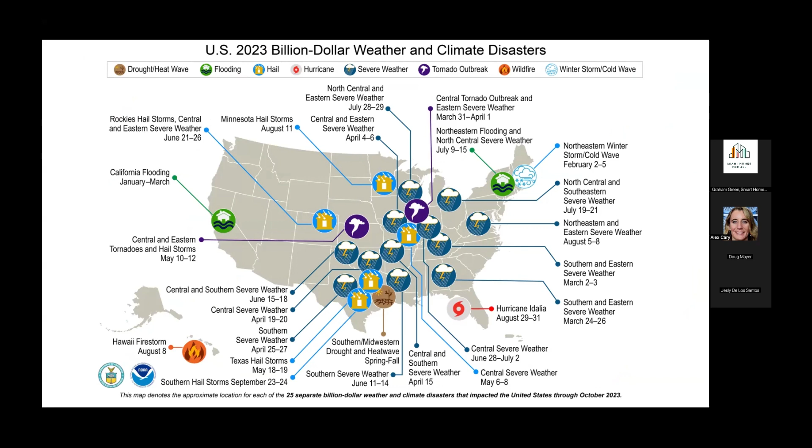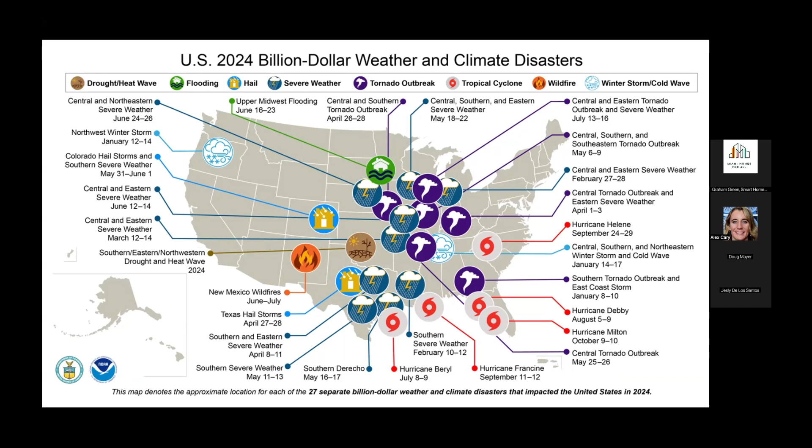Next slide, please. The Insurance Institute for Business and Home Safety, which Mary's going to speak a little bit more about, they are the science behind FORTIFIED. We take that science, we bring it to the communities and to folks like you to spread that knowledge. Next slide, please.

Mary, this is where I'm going to take over. We can do our work without Smart Home America, but it does not have nearly the impact that it has with them. They really do a great job of taking the science that we do and the standards that are developed and getting it out to make an impact in the world. It doesn't do a whole lot of good to do science and keep it in our lab.

What you are seeing here is our research center that is located outside of Charlotte. We are also a nonprofit. We're fully funded by the property and casualty insurance companies. And our mission is to find solutions to make homes and businesses more resilient. And so as part of that, we do a lot of science at this research center, and we have 2 mitigation programs.

We're talking about the FORTIFIED mitigation program today, and we really study 4 perils. We study wind, rain, hail, and wildfire. FORTIFIED covers the first 3, and then we have a separate mitigation standard for wildfire. So we're going to do a quick tour of the research center next.

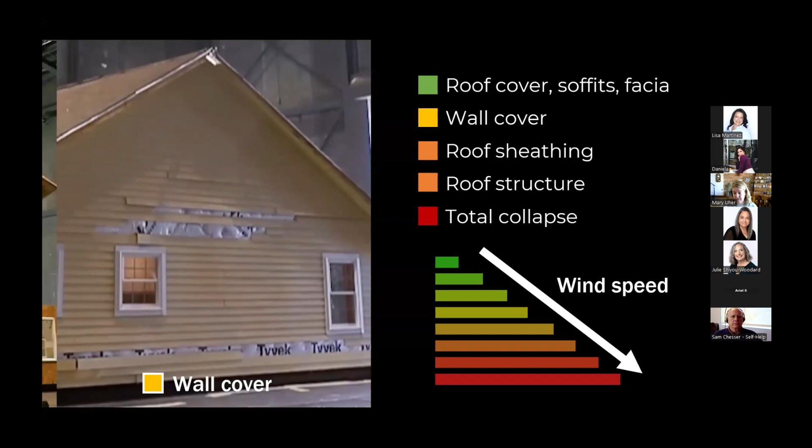To summarize what the expected sequence looks like: the first thing we're going to see is damage to the roof cover. That roof cover is going to come off, then wall cover, then either roof sheathing or structure, those are interchangeable, and finally, total collapse. So we know now that that is pretty predictably how any building is going to fail from a high wind event. The wild card in there is if something goes through your large opening and creates a big opening in your house, it could change that order some. And so that's where we talk about the garage door damage amplifiers.

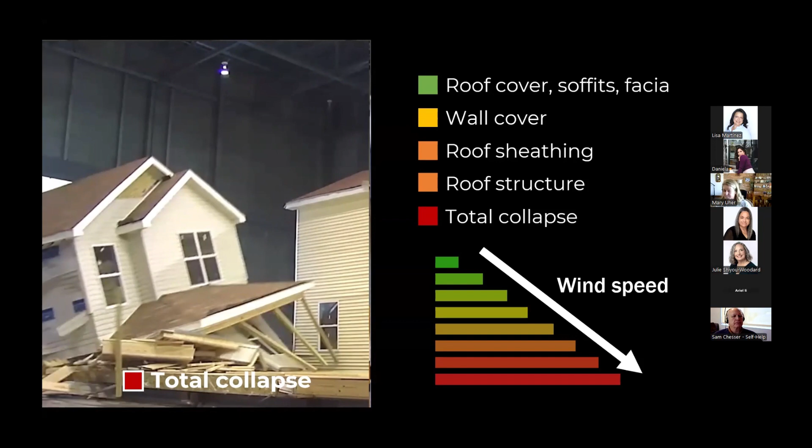So doing hurricane damage assessments, what we have learned is that newer roofs always do better. That's not terribly surprising. Homes built to newer codes did better. So that is really encouraging for you guys in Florida. Following Hurricane Ian, yes, it was catastrophic. Yes, there was a lot of damage, but the homes that were built to a well-enforced modern code really did a pretty good job.

Anywhere that you have low slope roofs, those are vulnerable. Installation is really important with any material. Low slope roofs are historically poorly installed or not installed in the way that they're recommended. So we see more issues there than we do in other places. Garage doors can act as damage amplifiers. And then we're going to talk quite a bit about sealed roof decks and how the use of a sealed roof deck can limit water intrusion.

And in Florida, you guys are lucky. Sealed roof decks are already part of your code. They are not part of the code nationwide. So this is something that for my family in Nebraska, when they re-roof, they put a sealed roof deck on, because even if they do lose their roof cover, they're able to keep that water out.

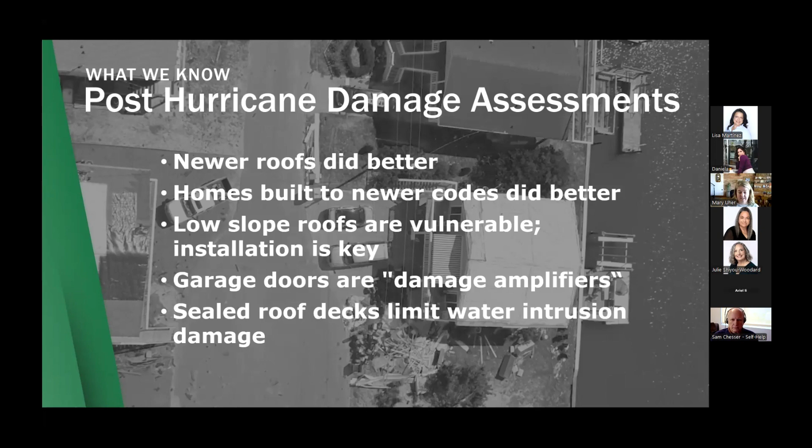So you will hear me, anyone who works for IBHS, say many, many times that mitigation always starts with the roof. And that is because up to 90% of post-cat claims include damage to the roof. So that is the spot that we are seeing the most losses. It's what we expect based on progression of damage.

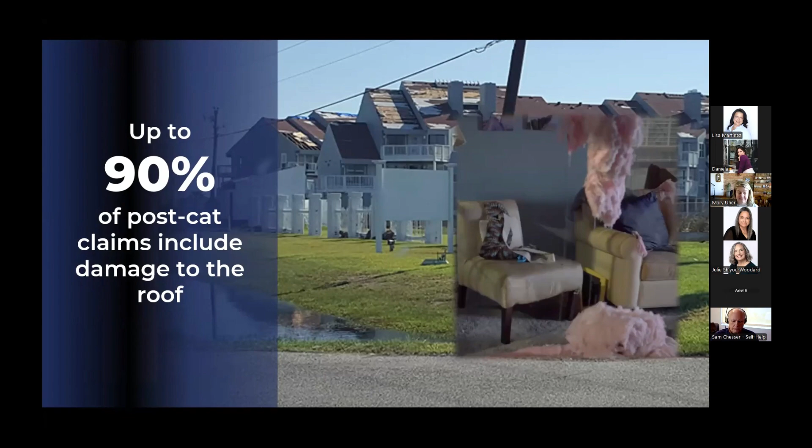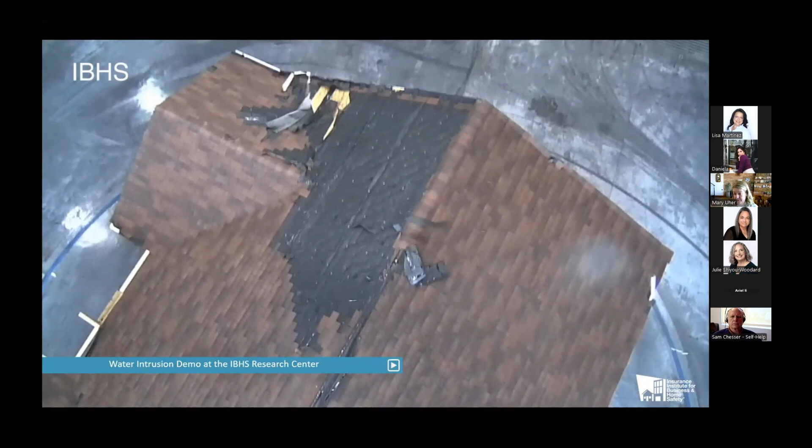But how can we mitigate against that damage? How can we build the roof in a way that we're going to really, really minimize the damage? And the biggest thing we can do is that sealed roof deck. So several years ago, we did a test in our facility. This is a 1,300 square foot duplex that is built identically side by side, except one side has tape on the seams of the OSB plywood, one side does not.

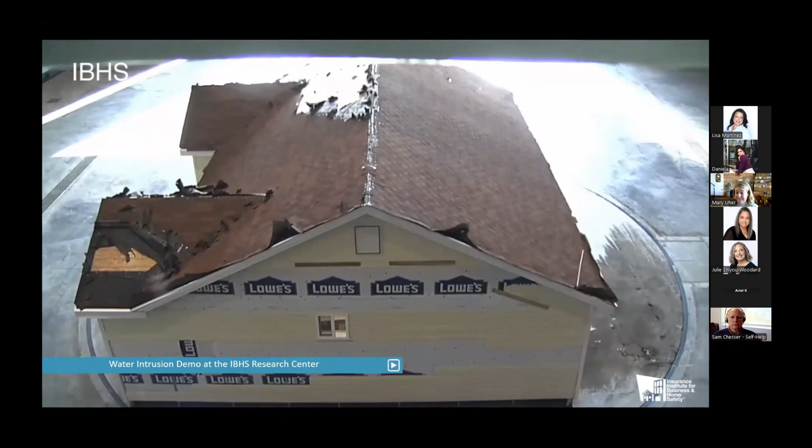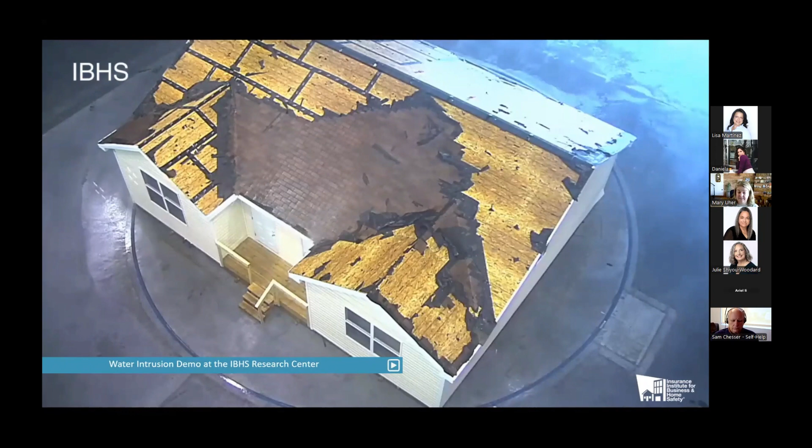So if 60% of the 8 inches of rain an hour hitting this house is getting into the roof, that is 7 bathtubs full of rain in an hour. Taping those seams can keep 95% of that water out. This duplex is 1,300 square feet, single story, built very similarly to how things are built throughout the country.

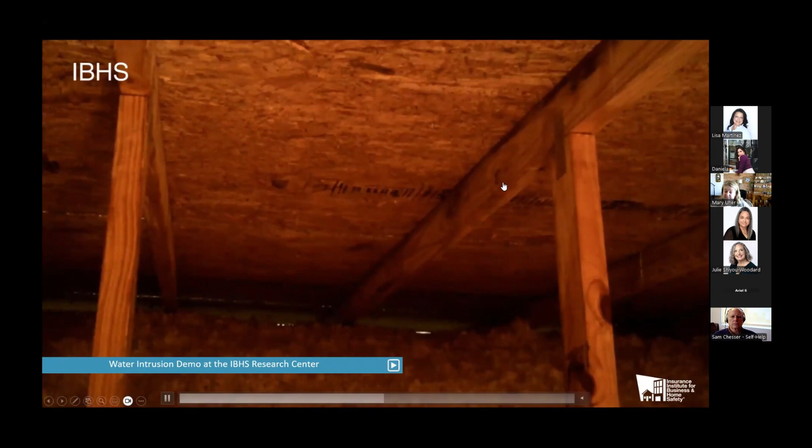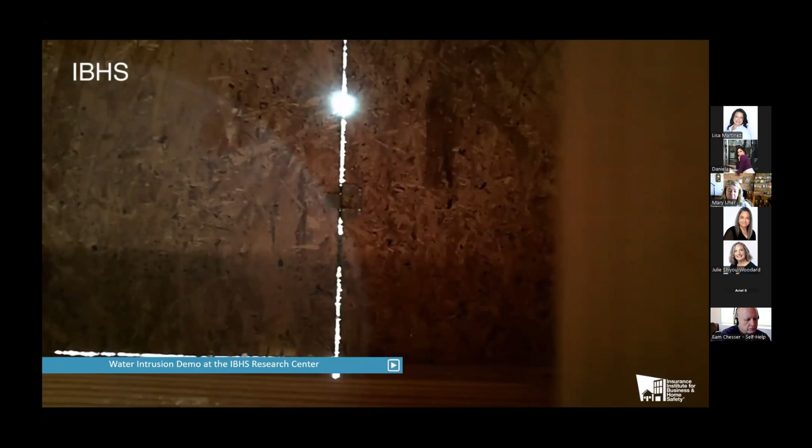So on the side without tape on the seams, you can see water start coming in at all of the different seams, at light fixtures, at bath fans. I found my leak in my roof in my bath fan, and this picture could basically be from that. So all of these penetrations allow water to come in.

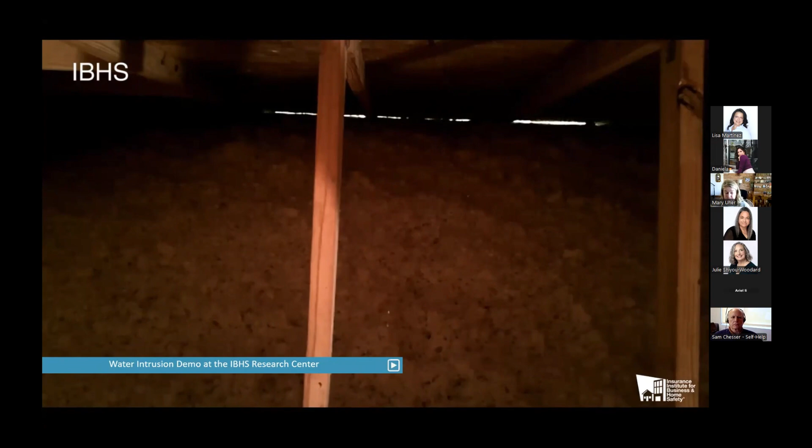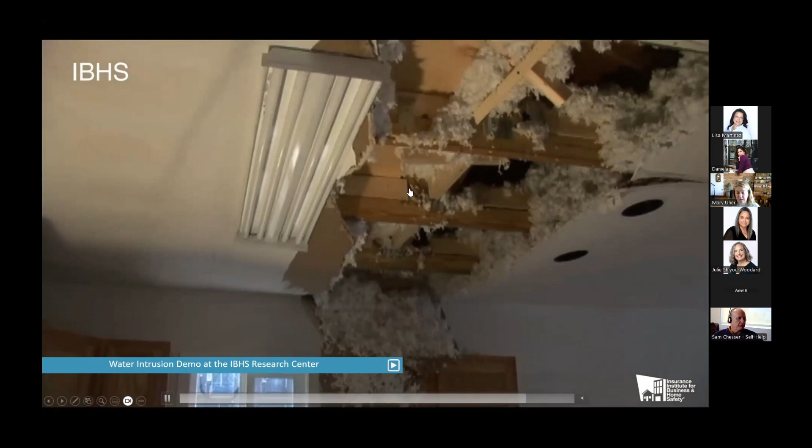And once that water comes in, it's soaking everything, it's adding a lot of weight, and it's creating a lot of damage. So what it causes is really heavy insulation and a home that looks like this that a family is not going to go back to quickly. And if they have power and if they can dry it out, they may be able to go back somewhat quickly, like within a few months. But realistically, especially in Miami after a major hurricane, they may not have power. The mold may take over.

This side that we just snuck past was the side with tape on the seams. It was so dry you could walk in and sit down on the couch and be completely dry. A family could remain in that side of the home. And the difference in construction there was about $500 worth of tape on the seams of the plywood or OSB.

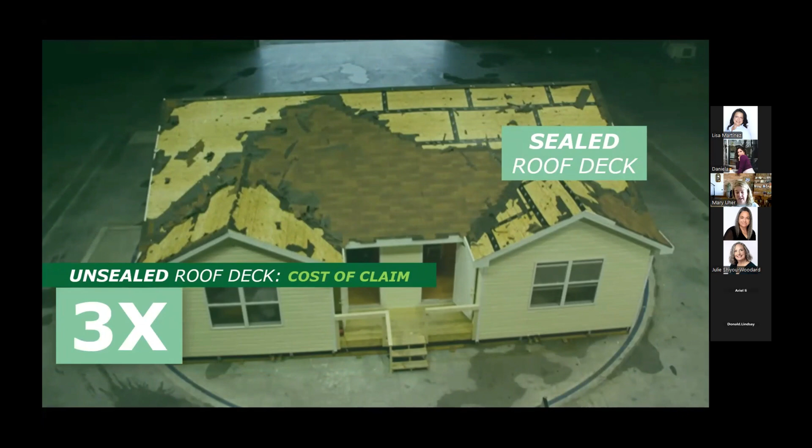And following that, we had adjusters come in and take a look at the two sides of the property. And what we found is that the sealed roof deck had a claim cost at the time of about $7,000. It's not adjusted money. But the unsealed side's claim was 3 times as much. So 3 times as much money was spent because they chose not to put this tape on the seams. And that was the only difference on these two sides.

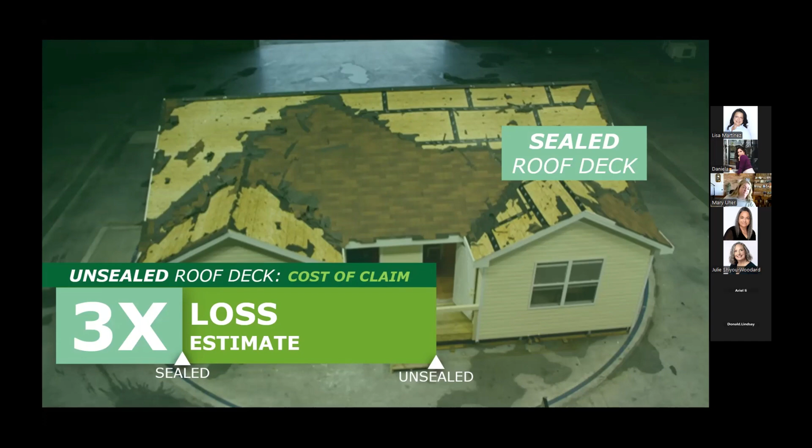So sealed roof deck is already in the Florida Building Code, and it is a very critical part of the FORTIFIED program. We are going to jump now into the FORTIFIED program. And within the FORTIFIED program, we have 3 different pathways or 3 different standards. We have the FORTIFIED Home Standard, FORTIFIED Commercial Standard, and FORTIFIED Multifamily Standard. It is important to understand the distinctions between these.

I am going to speak today mostly to the FORTIFIED Multifamily Standard, which is structures that are built to be rented, that are apartment complexes. It could be townhomes that are built by a builder to be held and rented. Anything that is commercially insured is going to fall under either the commercial or multifamily program. The home program is single family homes, duplexes, townhomes that are bought and sold in the traditional manner.

I live in Maryland now. My whole neighborhood is townhomes. We would fall under the FORTIFIED Home program. I will also put the caveat on this that I talk mostly about the FORTIFIED Home program. So I will try to stick to multifamily language, but if I say house, the technical requirements are very similar for the 3 programs. The process is a little bit different. I definitely have the multifamily and commercial process slides in here.

But it is important to understand that the very first step, if you are pursuing a FORTIFIED designation, is to understand which program it's going to fall under, whether it's going to fall under FORTIFIED Home, FORTIFIED Commercial, or FORTIFIED Multifamily. As we look at the FORTIFIED Commercial and Multifamily programs, for an overview, and this is for all 3 programs, there are 3 different levels: roof, silver, and gold.

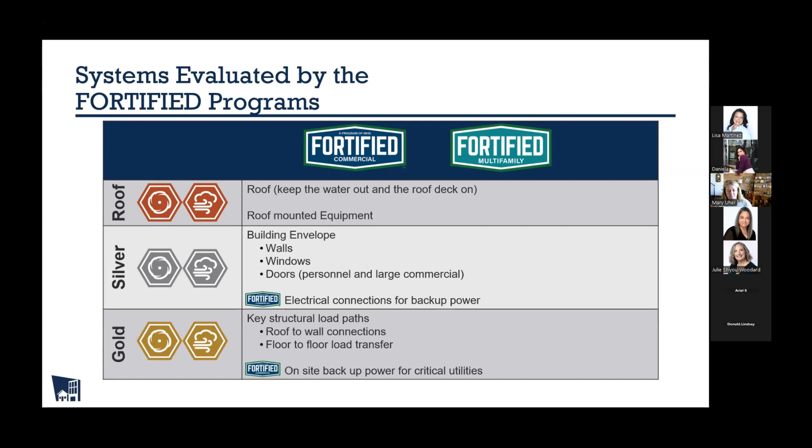So before we dig into the details of Fortified, I did not give you guys the disclaimer that I am a structural engineer, and I'm going to try to not be too technical, but bear with me because I'm going to be a little bit technical. I want to look at how Fortified compares to the Florida Building Code. I missed taking the home out of this slide, but Fortified in general.

So you guys all know that within Florida, you have some different regions. You have a windborne debris region and you have a high velocity hurricane zone. The high velocity hurricane zone is already very similar to a Fortified Gold. The areas that are in either a windborne debris region or a high velocity hurricane zone already have essentially all of the requirements of Roof in them. So if we look at how Fortified and the Florida Building Code compare, those roof-related requirements are very similar.

One of the changes is that our maximum nail spacing for the roof sheathing to the roof rafters is 4 inches on center. The maximum spacing per the building code is 6 inches on center. Now, engineers are always going to control what this spacing actually is. But for us, if an engineer says they could do 5, we would still require those nails to be at 4.

And then one of the differences that may be surprising is that the Florida Building Code actually allows fewer options for sealed roof deck than Fortified does. So it's really important to understand both the code and Fortified and make sure you are following whichever is more stringent, as long as you're allowed to do that. We never want to override the code. The example of a sealed roof deck method that isn't allowed in Florida is a fully adhered membrane, which is essentially a big 3-foot wide sticker that you roll on over the roof sheathing. So we would not allow that in Florida because the code does not allow that.

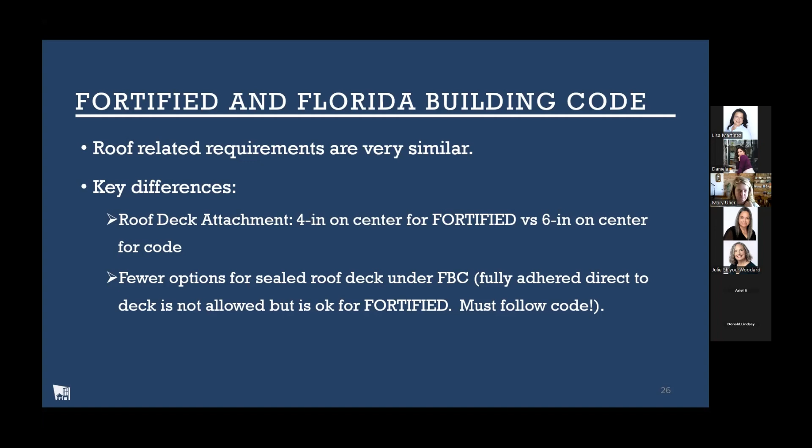Other key differences for the programs is that we require exposure C for all components, which really comes into play with roof cover design pressure calculations. This is something your engineers are going to do. Within the building codes, there are different exposure categories, and they step up. A long time ago, there was an exposure category A. It has now gone away. Exposure category B is for typical suburban households or areas. We don't ever use exposure category B.

Exposure category C is for someplace where there's a little bit more pathway for wind, whether that's on the edge of a lake, on the edge of a subdivision, on a golf course, someplace that there's a little bit more run up for wind. And then exposure D is oceanfront. So we would require exposure C as a minimum no matter what.

Probably the single biggest difference between Fortified and the Florida Building Code is that we require opening protection in all areas in Florida, not just in the windborne debris region. So we would require at the silver level for all openings to be protected with a large missile D protection system. And then we require additional inspection and site-specific photographs of some of the material and installation.

So we have a third-party system where we have a group of people called evaluators who go out and work with the builders and the designers to verify the key components, ensure that they are properly installed, and actually gather site-specific documentation of these items.

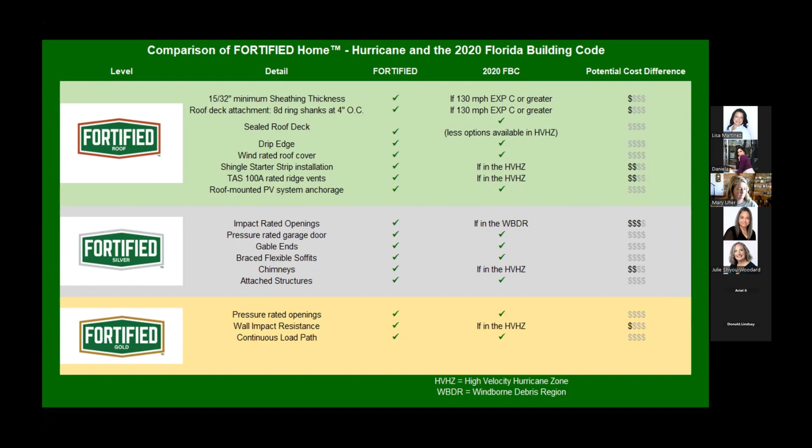So at Fortified Roof, we talk about this as sort of a 3-step process. We're going to nail it down, seal it up, and lock it in. And really here, the first step is I talked about the nail pattern being slightly different for Fortified than it is for Florida as a minimum. By adding additional nails, you strengthen the capacity of that sheathing being held down to those trusses or rafters, and you reduce the risk of the roof sheathing being that step in the damage progression.

Seal it up is the next step. That's the sealed roof deck. So there we're going to install an approved system. We have 4 different methods that can be used to seal the roof deck. Essentially what we're doing here is creating a secondary resistance to water, and that's what it's called in the Florida Building Code, a secondary water barrier, so that when your roof cover fails, because we're going to assume at some point it is going to fail, because let's be honest, homeowners are not great at replacing their roofs when they should, we want to keep the water out, because by keeping the water out, we're able to really reduce the losses and keep families in their homes, which is what's important.

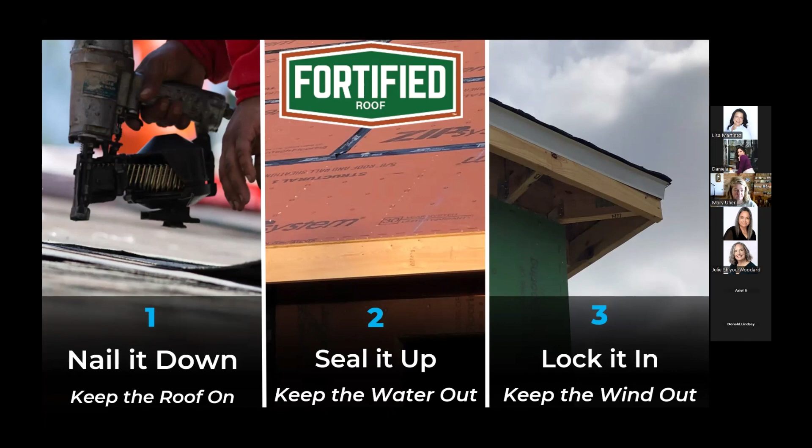And then we require a little bit of different detailing at the edges of the roof. So in our studies, what we have learned and what science shows is that roof failures always start at the edges. So by having a slightly different detail around the edges and installing a drip edge or edge metal around the sides, you can really impact keeping that roof cover in place and making the whole roof work as a system.

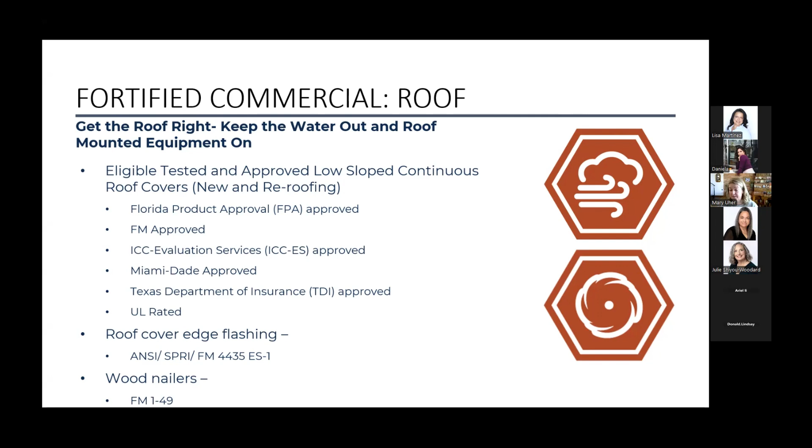So for Fortified commercial or multifamily, what this means at the roof level is that if you have a low slope roof cover, it needs to be a tested and approved system. We accept a lot of different systems, Florida product approvals, it can be FM approved, it can be ICC-ES approved, but we need a tested and approved system. And then our evaluators will verify that that system was installed as it needed to be installed per the tested assembly. We require that edge flashing, and we will look at a video here in a second that will point out why we require that. If there are wood nailers, there are some requirements for how those are attached.

For any steep slope roof coverings, they'd need to meet the site-specific design wind speed. So there we're just looking for the very specific, does this meet what's required of that steep slope roof cover? The sealed roof deck is required. The roof deck attachment, so that is where I'm talking about those nails, has a slightly increased safety factor. So for a commercial or multifamily project, what that means is as your engineer is designing, they're going to increase that safety factor a little bit.

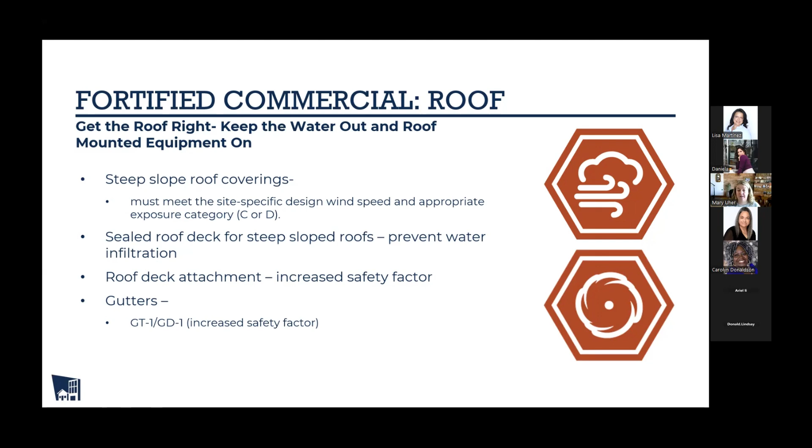So instead of multiplying by 1.5, they might multiply by 2. And that all depends on what code version they're in and what the system is and how they're designing. But there is a slightly increased safety factor. And then for gutters, we also have an increased safety factor and an evaluation of how they're installed. We don't just look at the roof system for roof. We also look at equipment, roof-mounted equipment.

So if you have an HVAC system, it needs to be properly connected to structural framing. I'm going to use Nebraska as the bad example. I love Nebraska. Their building code enforcement is just not great. You could literally put an HVAC panel on the roof in Nebraska and hold it down with CMU blocks at every corner, and that would be okay. For Fortified, that would not be okay. In Florida, you're going to have more enforcement than they do in Nebraska, but still just the extra verification that the design was done correctly and that it's connected to structural framing makes a big impact.

Mary, there's a question about solar cells on the roof. Yes. What happens when you have those, and do gutters help?

Okay, so I'm going to do gutters first. So gutters, they do not help. They also do not hurt when properly installed, but it is possible that gutters, especially if they're installed after a building is complete, could be installed in a way that damages the system of the roof. So gutters can be done. They don't necessarily hurt or help. Just like everything, they need to be installed properly.

Solar photovoltaics can very much so be done. They need to be properly designed in accordance with one of the accepted standards, which is the ASCE 7, which is the structural engineer's bible. It shows you how to calculate loads for everything. The Structural Engineers Association of California has a document on designing solar panels, or you could do a wind tunnel study. We have never actually seen that happen, but we do allow for it.

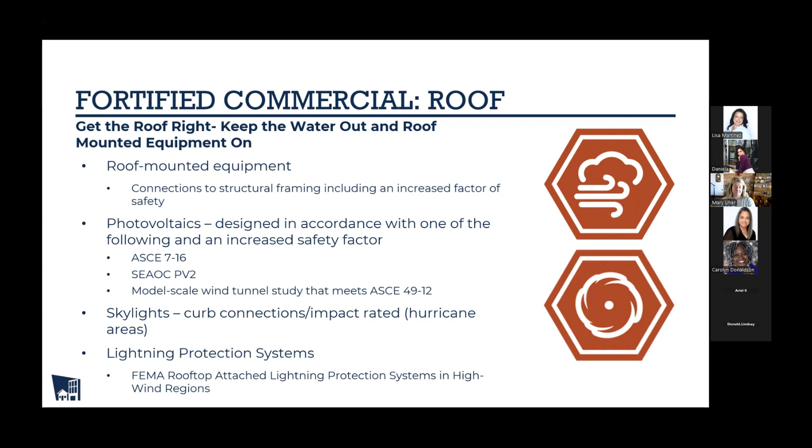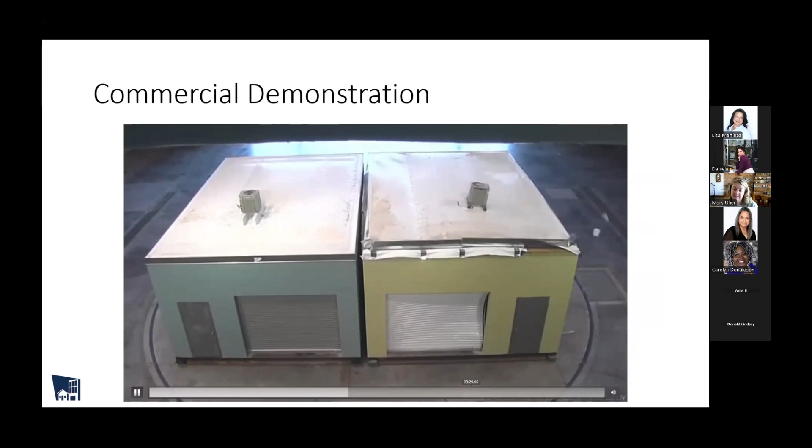I think that's in this video, but it prevents the roof from peeling off. And once that roof starts going, you're going to be in trouble. You start to lose other things. So by following slightly above code standards, and in Florida, very slightly above code standards, you're able to really mitigate against a lot of damage.

And it is less dramatic than I thought it was, but you can see when the openings start to fail, because that is why this roof starts to crack along here. What happens when an opening fails is that the wind gets inside the building. It's actually this window that fails, not the garage door in this case. The wind gets inside the building and it basically blows it up like a balloon. So let me find where it happens. Here you can see the window is solid. If you watch, the window breaks, the roof starts cracking, the walls start falling.

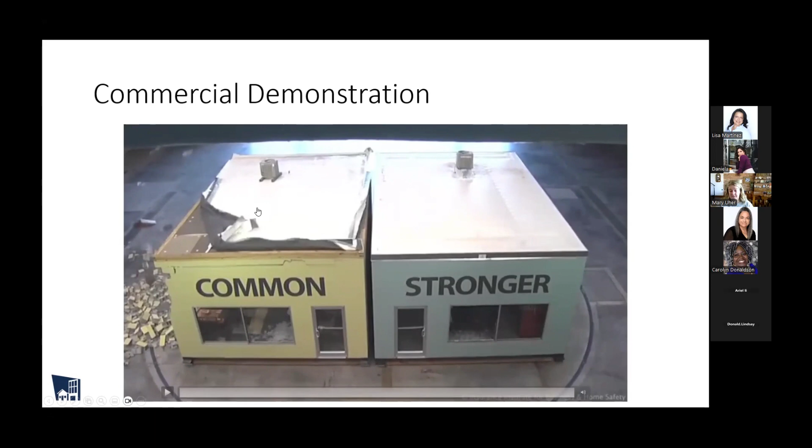So that is what we're trying to prevent at multiple levels. But even this roof cover failure is going to lead to a lot more loss than this side. The window failure is really what we're going to be talking about at the silver level. So at the silver level, we start looking at windows and doors, we start looking at exterior walls, and we start looking at gable end bracing.

We need here all windows, doors, and walls to be large missile impact rated for the entire state of Florida. We need any parapets or false fronts to be properly braced. We need all electrical and mechanical equipment to be elevated above the 500-year flood level. So we want to keep those things and the structure safe if it does flood. And then again, at the commercial level, we need connections for backup power. That does not exist for multifamily, but it does for commercial.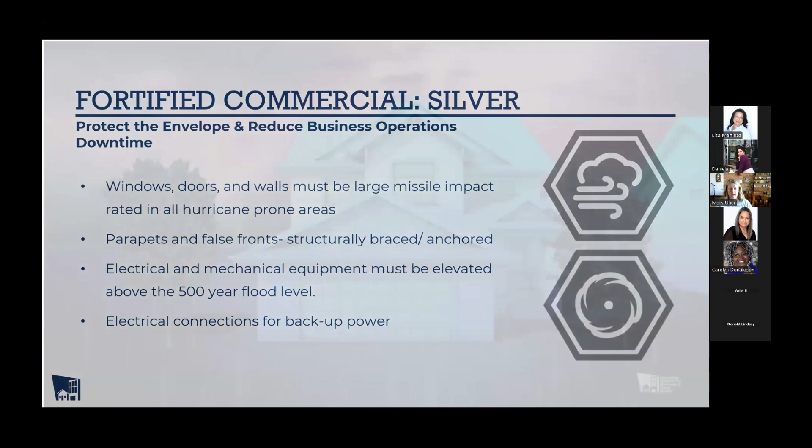So by just making sure that those doors and windows are properly rated, especially your large openings are properly design pressure rated, it's going to have a huge impact. You guys have a giant advantage here because you are already doing this. Most of your doors and windows are properly rated. The biggest thing that Fortified is going to do differently than what's in the code is we are going to do that additional verification step of looking at what was actually delivered on site. Does it match what was ordered? It's just an extra set of eyes to make sure that everything comes into place.

And then when we go to the Fortified Gold level, we're really looking at a continuous load path. For anyone in Florida, especially for new construction, to do Fortified Silver and not Fortified Gold is ridiculous. I mean, it is just silly because you guys have engineers on every single structure anyway. So your engineer is already, in Florida, required to be designing you a continuous load path, looking at how all of those loads get into the building, get through the building, and get out through the ground.

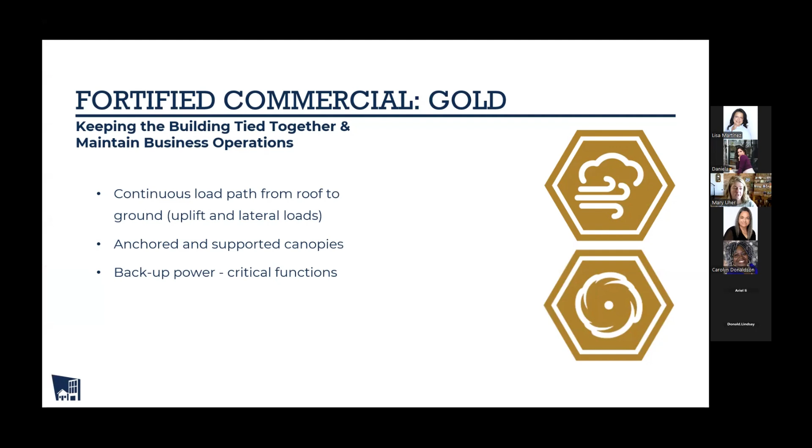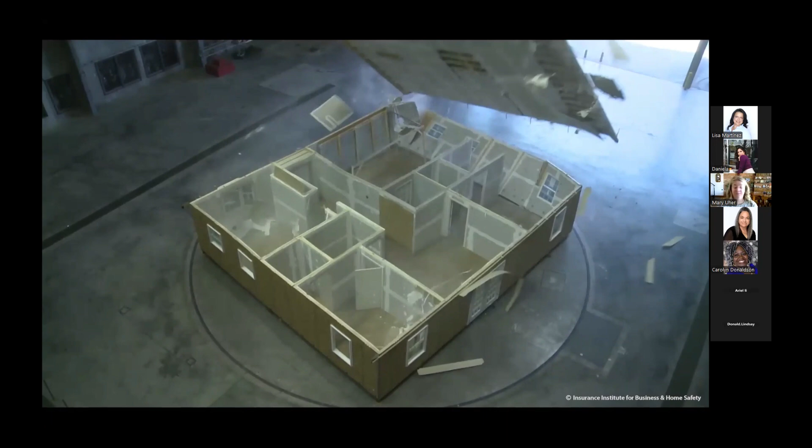And what we're trying to prevent are failures like this. So here you see that whole roof come off and fly out. Like I said earlier, it seems dramatic, and I've seen it happen. In this case, this was a great example of our researchers getting to play. This house had been tested several times, and they said, what would happen if we just disconnected all of the roof to wall anchors? And this is what happened. And I can promise if they had known they could get it to fly that straight out the door and get a video that could get us this much use, they would have done it way earlier. But unfortunately, we do see this failure at wind speeds where it shouldn't happen throughout the country.

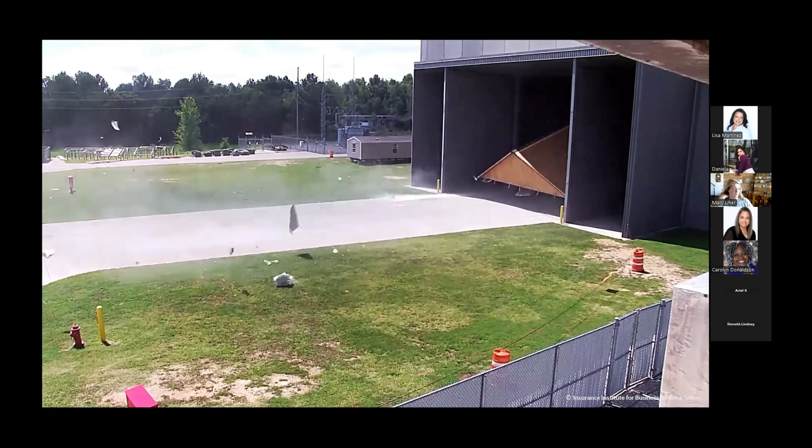So I've talked some about verification, and really within verification for the commercial and multifamily programs, there are 3 pretty simple steps. The first thing is, as early as you can in the project, you're going to submit a multifamily or commercial eligibility application for each building. So if you have a site that has a bunch of buildings on it, you do have to submit for each building. That application will go through our team, who will help make sure that your design team understands the requirements. So the number one thing we see come up here is if somebody submits really late, especially somebody in the middle of the country, they may have designed everything to exposure category B. That requires a lot of redesign to get it to exposure category C. So the earlier you can get an application in, the better.

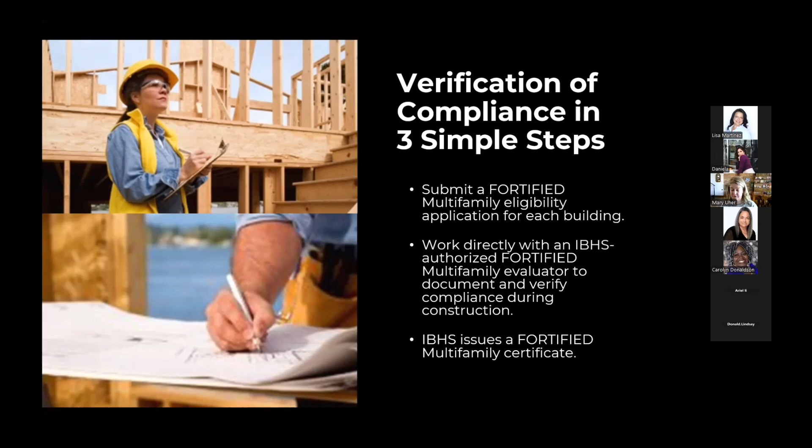Once our team has looked at your application and figured out that we think it's going to make sense, we will connect you to an authorized multifamily evaluator who will work directly with the design and construction team to document and verify that compliance during construction. Once the evaluation is done and the structure is complete, IBHS will issue the Fortified multifamily certificate. This evaluation and compliance part is going to be the single biggest hurdle in Florida because your code is already so close.

So some of the key factors, I already said it, but you cannot say it too many times. The faster you can engage IBHS and the evaluator, the earlier in the process, the better you're going to be. Making sure Fortified is written into bid documents so that people know that it's there. Reaching out to us and to Candace to help educate contractors, especially roofing contractors, on what's going to be required is going to be important. This says PV units attached to roof in hurricane-prone regions are acceptable but not recommended. And that's just because it can be complex to get all of the verification there. I think you guys are going to have less issue with it than somebody in Houston who does not have a well-enforced code.

Mary, I'd like to interject here with a question because it goes along with what you're saying about the building codes. A question came in: how often does Florida update their building codes? I'll let you start with that one. So Florida updates about every 3 years. A new code came out for Florida in January of 2024. The Florida building code process is back underway now, so there will be an additional new code that comes out about the beginning of 2027. So about every 3 years, the code gets updated. It's also asked if IBHS ever influenced revisions of the state codes. We do have team members who sit on several of the Florida building code councils and groups.

Looking at the fortified program summary, for the fortified home program, we currently have over 70,000 designations nationwide in 31 states. Alabama is leading with over 50,000 designations. The fortified multifamily and commercial programs are a lot newer. We started as the fortified home program and added commercial 5-ish years ago and multifamily about 3 years ago. We currently have about 250 commercial and multifamily designations nationwide. And remember, these are buildings, so that's way more than 250 families, but 250 buildings have been designated.

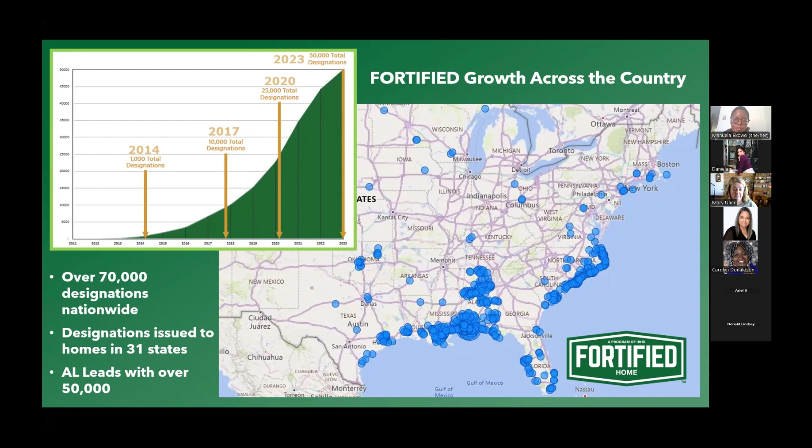Louisiana is leading the designations for fortified multifamily. They have close to 200 of them because it is written into some of their guidelines. Fortified multifamily is mostly gold designations, and they exist in 7 states so far. So that is a summary; you can see the growth of the program. We are continuing to grow at that rate. We hit 50,000 designations in 2023 and exceeded 70,000 last year. We designated about 18,000 houses last year, which feels crazy, but we did it, and it's a great accomplishment, and we're putting a lot of families in safe houses. And I'm going to let Candace or Julie talk a little bit about some of the results that we've seen.

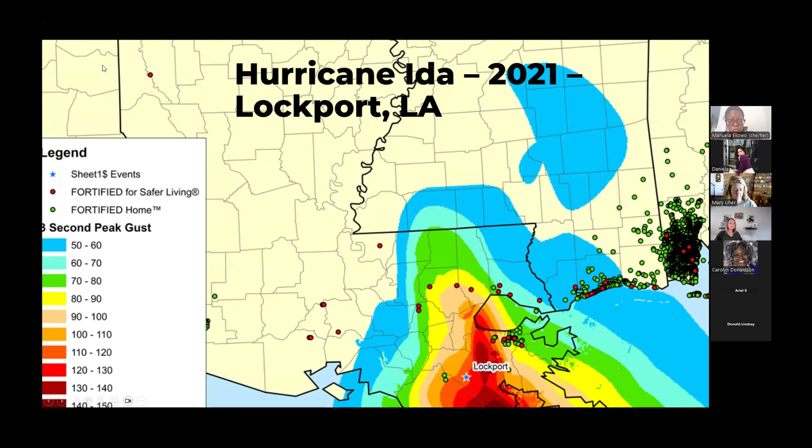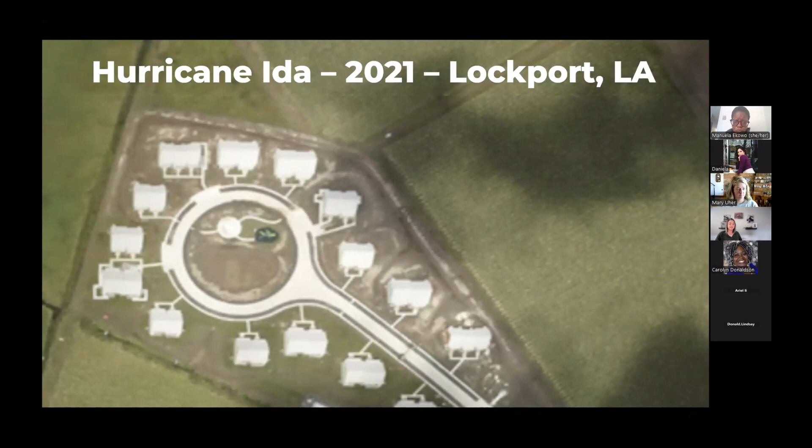So what you're looking at here is buildings that were in the process of being built. They were about 3 weeks away from completion at the time that Ida hit in 2021. Next slide. This is an up close of the complex that you saw just a moment ago on the right that was in the process of being built.

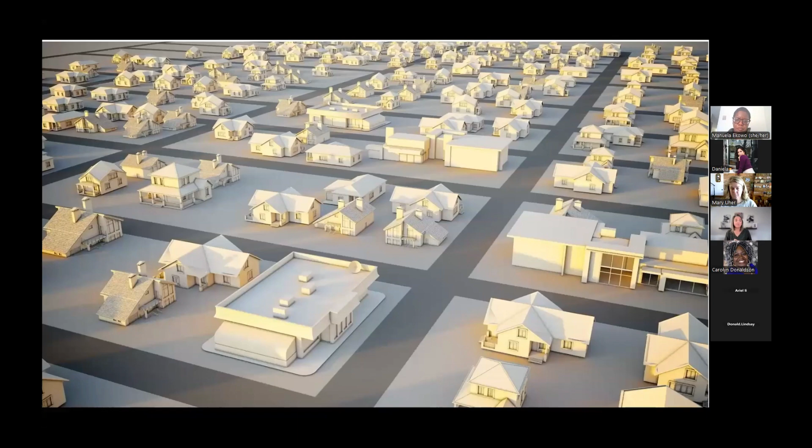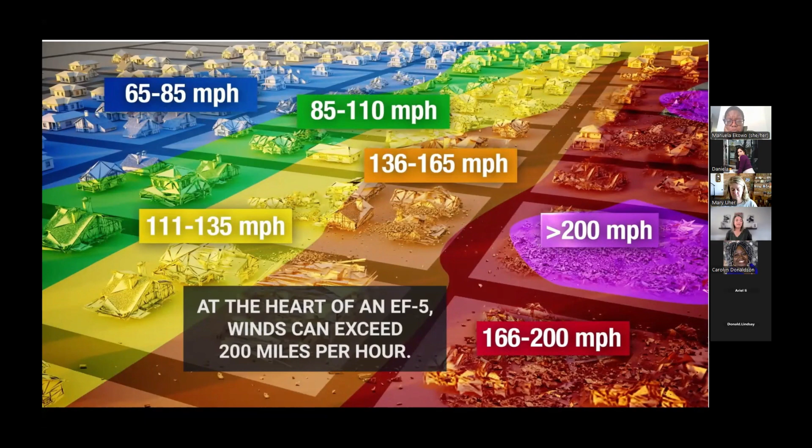So this one is dealing with tornadoes and narrowing the path. Wind is wind, regardless of whether it's coming off of a hurricane or a tornado. We can't eliminate all of the damage that happens with a tornado, but what Fortified looks at doing is reducing the damage on the outskirts of it, where you're looking at the yellow, the green, and the blue.

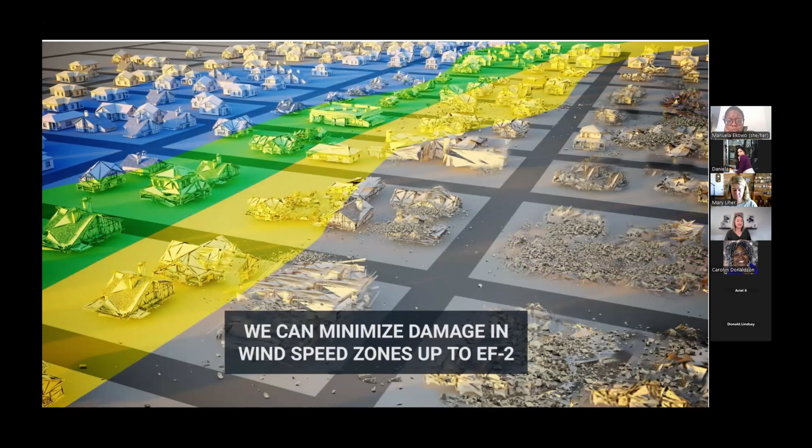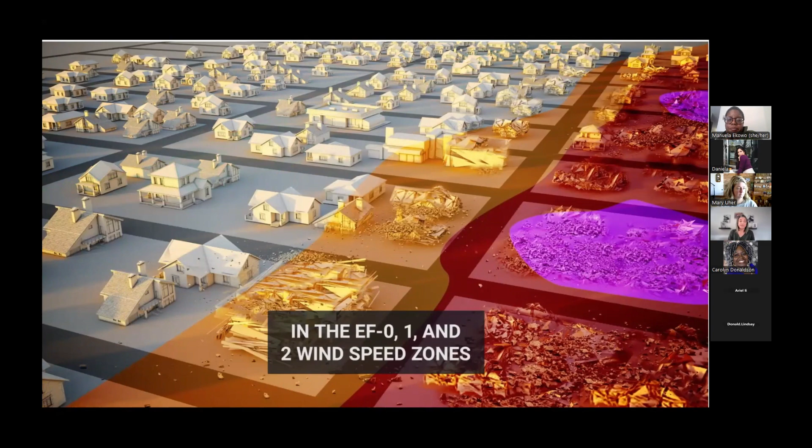A lot of the damage that's done is addressed through the Fortified program, by addressing the roof and the continuous load paths of the homes. Things like the rafter ties, the stronger garage doors that Mary's been talking about, reinforcing that roof, can help that home better withstand up to 135-mile-an-hour winds. Narrowing the path allows us to protect those homes better. Next slide, please.

We also have developed a resilient housing planning guide. For communities who do not necessarily have planners, it's a step-by-step to help them recognize where their vulnerabilities are and how those vulnerabilities can be addressed pre-disaster.

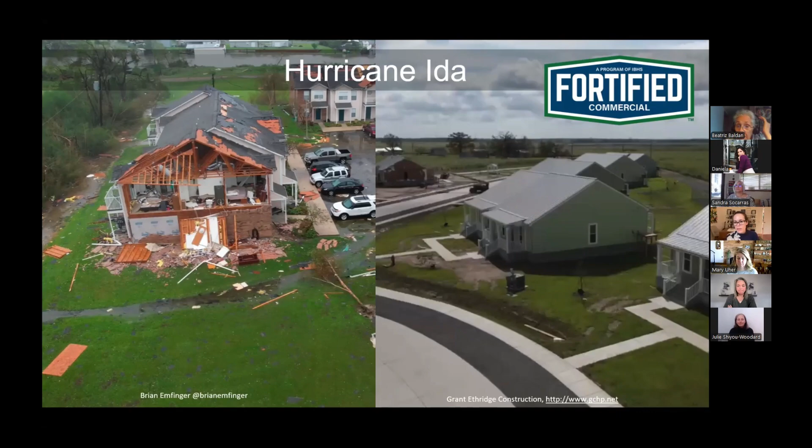I have a question. As I see, it's an analysis of the house built and all that sort of thing. But what called my attention on the last video that we saw, Julie, was there are no trees around that house. Now, we know the importance of trees. How does a tree near a house affect the home?

So there's two things about that property. One, that was a redevelopment of sugarcane fields. So that's why there were no trees there. It was originally a sugarcane field, which meant it was a repetitive flood area. So that structure was also built above the base flood elevation, and that area did flood and will forever have flooding. So it did not experience that. And as part of that, the electricals and major appliances were above that base flood. So that was very unique because that is Louisiana, and it's similar to Florida in that it's technically an entire floodplain. So flood is one of their largest risks every day.

The other thing, if you want to speak specifically to trees, is that some insurance companies are starting to focus, not based on sound data, on the idea that all trees need to be away from a house. The science does not support that, especially from an energy sustainability standpoint. There are hurricane resistant trees. There are trees that can get through significant wind events repetitively. If you look to the University of Florida's forestry, and if Graham can remember, we will go find this and get it over to Annie so she can share it out.